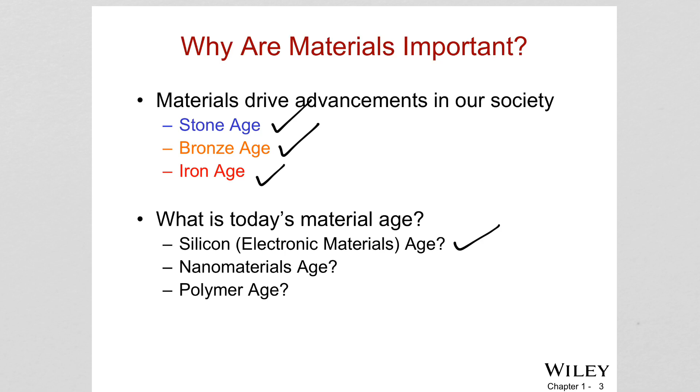So why study material science and engineering? Because things engineers design are made of materials, like products, devices, components. And now we are requiring new materials with new properties to fit our designs. And effective design and usage of materials can be achieved by fully understanding the principles of material science and engineering.

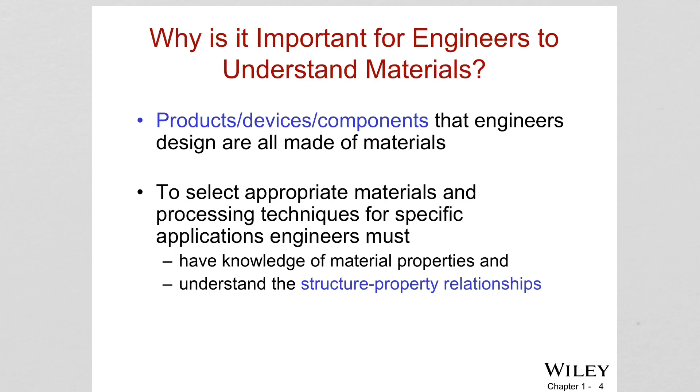So actually, material science and engineering can be defined as the relationship among the structure, properties, and processing. Okay, so there is this connection among the common elements in material science and engineering. So if you look at properties, they depend on the structure. And properties are determined by processing. And processing, of course, affects the structure. So all the useful properties of materials strongly depend on the internal structure of the material, and the internal structure depends on how the material was manufactured.

So in this example, we are going to see this relationship between the properties, structure, and processing. So processing parameters such as cooling rate, that means how fast you cool down the material. And in this example, our material is steel. So how fast we cool the material will directly affect the resulting structure of the material, as you can see. And the structure here is demonstrated by the microscopic images given, A, B, C, D, right? And this is the same material, but it is showing different structure. And why is this happening? Because they are cooled down at different rates.

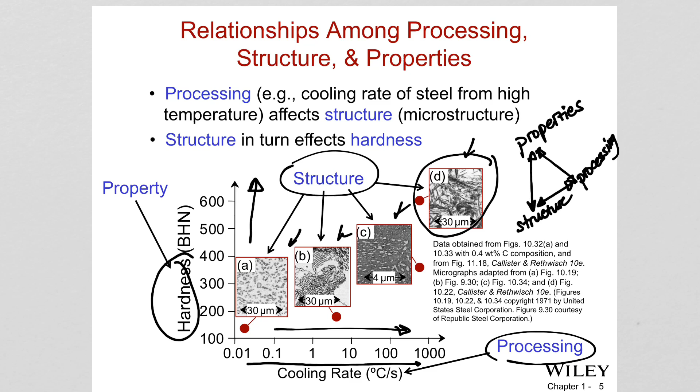As you can see on the x-axis, the processing parameters are being changed. So as we go towards this direction, 1000 degrees C per second, we are increasing the cooling rate of the material. And as the cooling rate increases, the material exhibits, as we see under microscope, a finer structure. And of course, this type of structure will directly determine the property of that material. In this case, the property is a mechanical property called hardness. And as cooling rate increases, the hardness increases, because the structure of the same material is changing. So this is just a demonstration for you guys to understand the relationship between properties, structure, and processing.

Let's look at the classifications of materials. Three basic categories: metals, ceramics, and polymers. Why? Because all these material families have common atomic structures. Of course, in addition to that classification, there are composite materials, which are basically engineered combinations of two or more different materials. So what are metals? Metals are basically composed of metallic elements. Examples: iron, aluminum, copper, nickel.

And they also contain non-metallic elements. You can add small amounts of carbon or nitrogen to iron, which will give us steel. So we can add small amounts of those non-metallic elements to metallic elements, giving us metallic alloys.

These materials are very strong and ductile. Ductile means easy to deform, meaning the material can be deformed to a large extent without failing. They also have high electrical and thermal conductivities. They are not transparent to visible light. The bad thing about metals is that they are susceptible to corrosion.

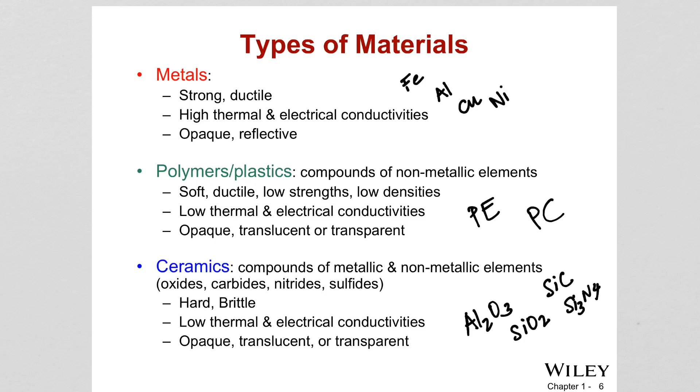So all engineers need to select materials for their design, and currently there are 160,000 materials available to us.

So how then will engineers select their material for their design? First, we need to determine the required properties for that application — properties such as mechanical, electrical, thermal, etc. Often not only mechanical properties are required; together with mechanical properties, there might be a requirement for an electrical property, so it's a combination of properties. After that, we rank materials based on these properties and identify the candidates, and based on that, we can choose the best material.

And of course, the corresponding processing technique can be determined based on what size and shape you want and what set of properties you want — processing technique examples include casting, welding, etc.

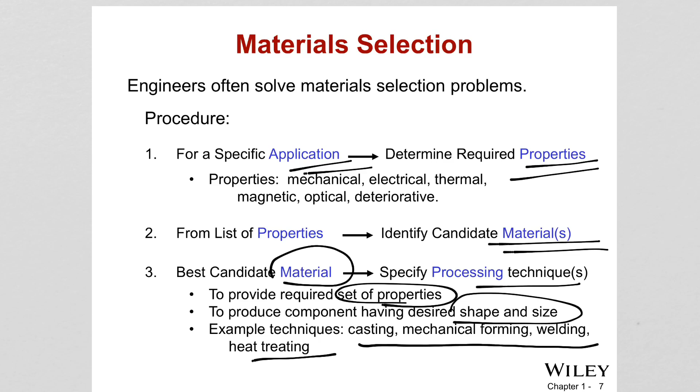So when we say a property of a material, what do we mean? Properties of materials fall into 6 categories: mechanical, electrical, thermal, magnetic, optical, and deteriorative.

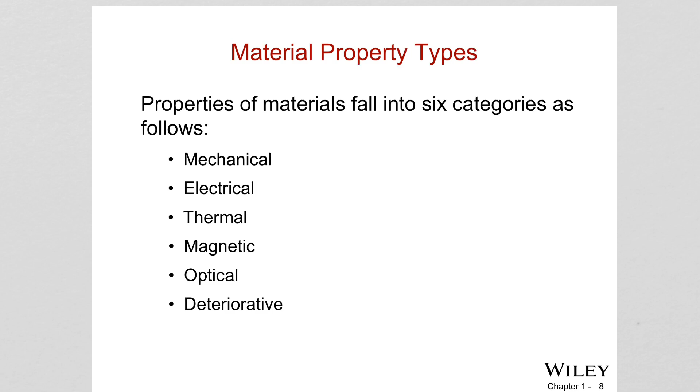Mechanical properties are related to the deformation when a force is applied. Examples of mechanical properties are hardness, strength, stiffness, or resistance to fracture.

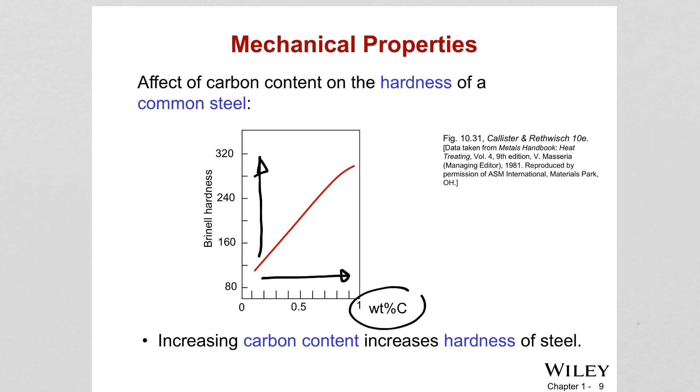This is directly related to the structure of the material. We just learned that properties are related to structure, and this example demonstrates that concept. Here we see how the hardness of a common steel changes by increasing the carbon content. By adding carbon into iron, this becomes steel, and as we add carbon, the hardness of the steel increases. So we can manipulate a mechanical property by changing the structure.

Electrical conductivity, electrical properties relate to how a material behaves when an electric field is applied. Electrical conductivity is again a property that can be changed by changing the structure.

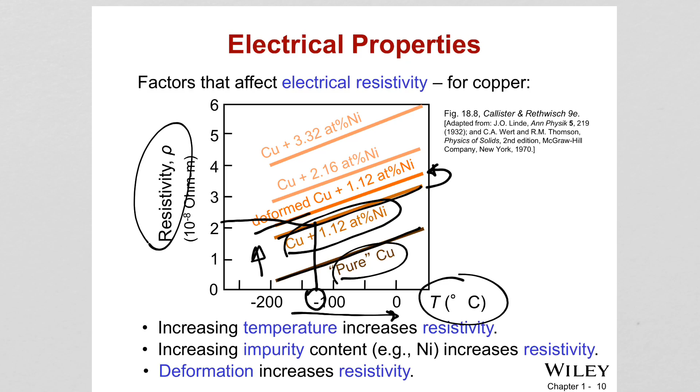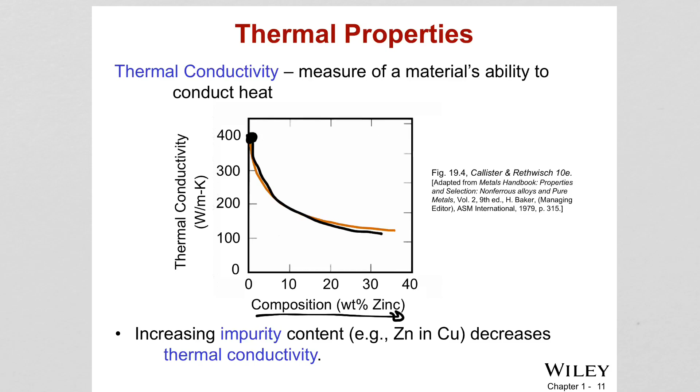Highly porous materials are poor conductors of heat because there is air in the structure. An example is the material used in space shuttle thermal protection systems, made up of silica tiles - approximately 90% air and the rest silica from sand. Air is a poor conductor, so this provides a material with very low thermal conductivity. This is demonstrated here with a microscopic image showing how porous the structure is and how low the thermal conductivity is, since the guy is able to hold the material without getting burned.

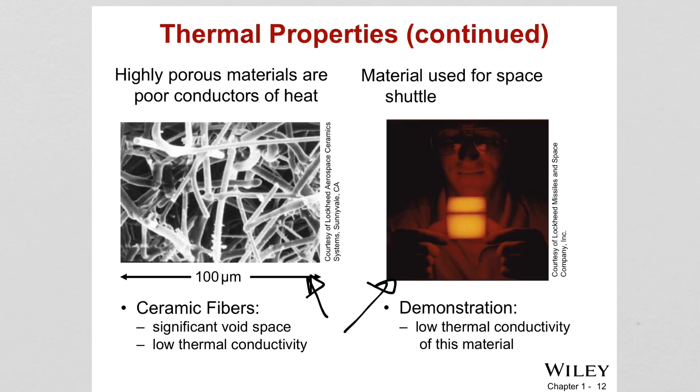Magnetic properties are basically the response of materials to the application of a magnetic field. Magnetic storage is where such properties are utilized. In this illustration, we see a material used as a recording medium, a magnetic material, capable of being magnetized by the application of a magnetic field. It becomes magnetized and stores this magnetic energy.

Magnetic permeability is the material's ability to magnetize under an applied magnetic field, and again this property is affected by the structure. In this case, it's affected by the addition of elements such as silicon to the iron structure. We know iron is a magnetic material, so let's see how adding silicon changes it. With the application of the magnetic field, we see how the material magnetizes, which is defined as the magnetic permeability, and it increases with the addition of silicon. So we're able to create a better medium for magnetic storage.

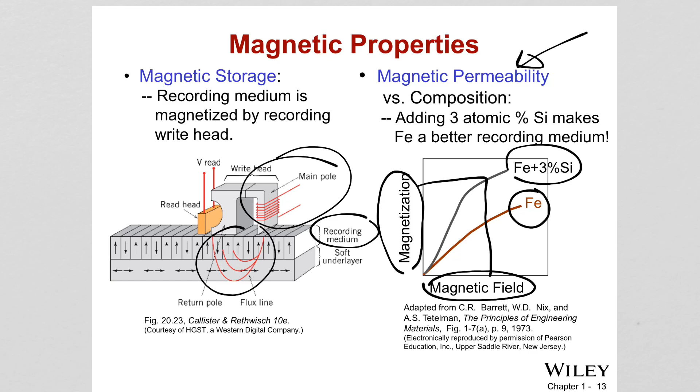Light transmittance of materials depends on their structure, of course. In this case, we're going to see an example where we are observing that optical properties are controlled by grain structure, and we're going to see what grain structure means.

So aluminum oxide may be transparent, translucent, or opaque depending on the material structure. You guys need to be careful, this is the same structure, same material, right? This is alumina or aluminum oxide, same material showing different properties. The only thing that changes is the structure.

In the first case, we are seeing a single crystal. So single crystal means, let me try to explain it to you. If you look under the microscope, what we are seeing for a single crystal is the atoms are aligned in a certain order. So all atoms are aligned in a certain direction, like this.

So this creates a property which we call transparent materials, right? Transparency. And what if the atoms within the material are not all aligned in a certain direction? What if they align randomly in different directions? That's what creates polycrystalline material.

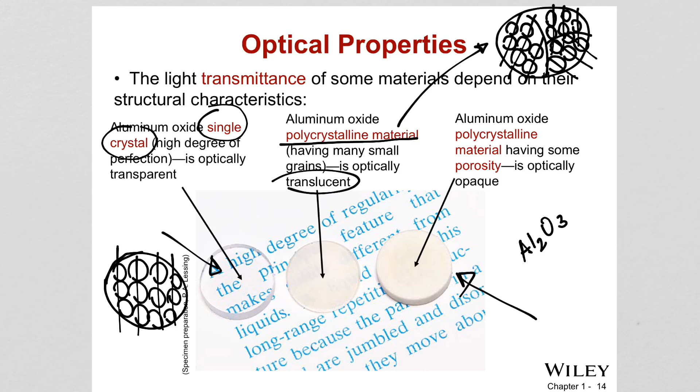So the deteriorative properties, what are these? These are related to chemical reactivity of materials such as corrosion. And corrosion, you guys can think about it like the environment is eating up your material, and you are losing material to the environment, and therefore cracks can form.

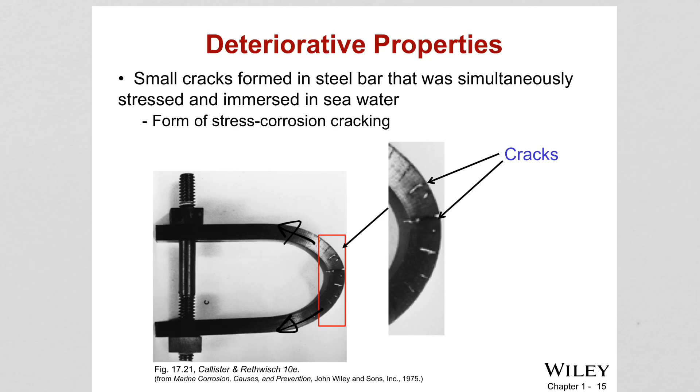In this case, we are seeing a steel bar which was immersed in seawater, and of course it is under stress. And then this combination of the environment and the stress causes cracks to form. One way to prevent this is to do heat treatment, because heat treatment is able to relieve the stresses inside the material. And we are seeing this for aluminum alloy.

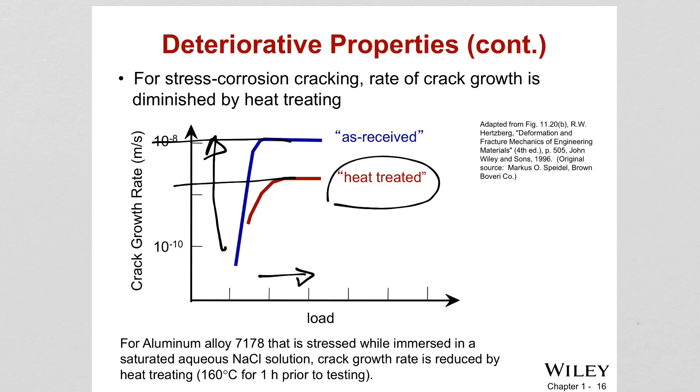For the same type of loading here, crack growth rate can decrease if we heat treat the material. Basically, put it in an environment where we apply heat. It is because it relieves the stresses inside and lowers the chances of crack formation, basically.

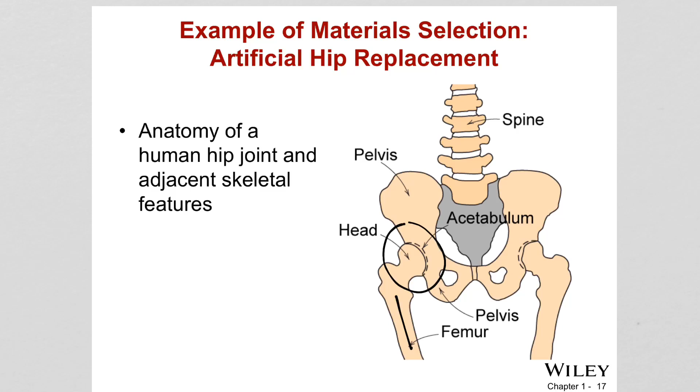And of course, damage to this region can be very painful and reduces the range of motion. Therefore, the question now is: what type of properties would be necessary for such a material?

The first thing is biocompatibility. That means the material has to be compatible with human tissue, not toxic, and it should not be reactive to body fluids. It should be corrosion resistant, right? Besides, it should support mechanical forces, have good mechanical strength, good lubricity, and high wear resistance, right?

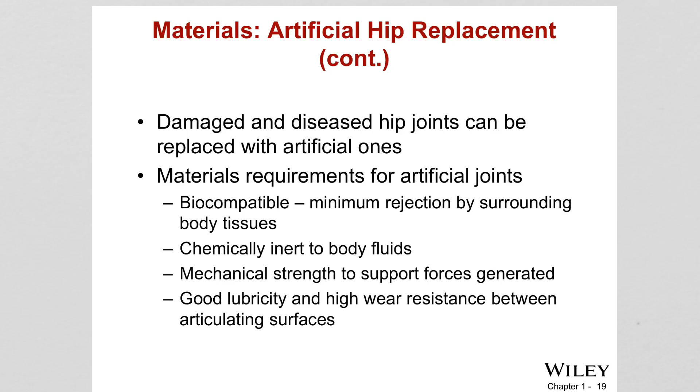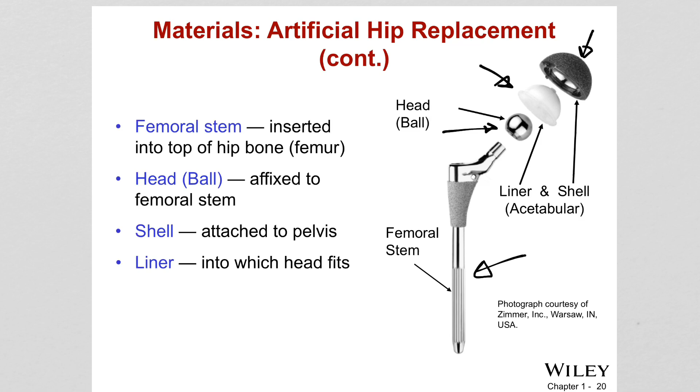Currently these materials are being used: titanium alloys are preferred for stems, or the cobalt-chromium-molybdenum alloy. These materials have excellent mechanical properties and corrosion resistance because frictional forces are generated at the ball, so we need a material that has high wear resistance, basically.

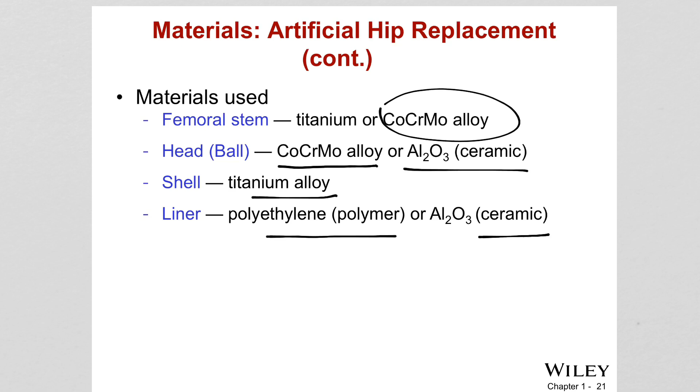So in summary, what have we learned? We learned that as engineers, we need to understand the relationship between structure, properties, and processing, right, so we can make a correct decision. And we have learned that materials are classified as metals, ceramics, and polymers, with different properties: mechanical, electrical, thermal, etc. And as engineers, we have this important role to select the best material for our design, for the application.